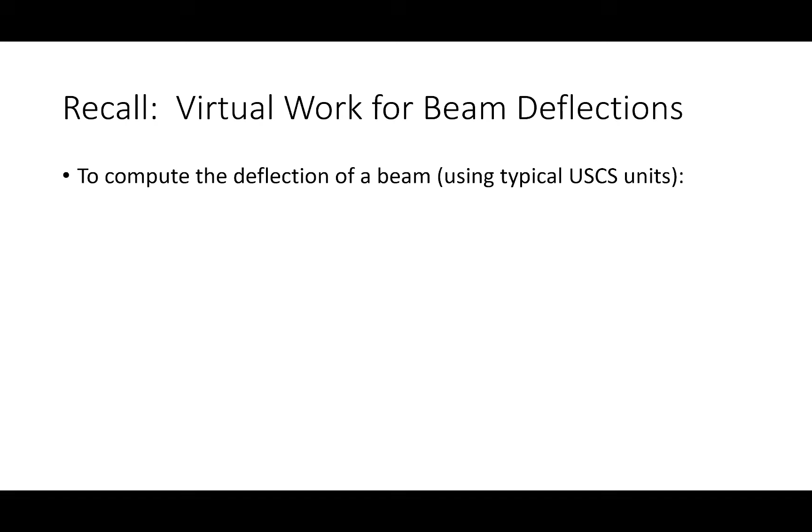So if you can do that, you'll be good. As I said, to compute beam deflection we'll use the following expression, summing up integrals instead of fractions. We'll use the same idea whether we're looking at deflections or rotations. So if I have a beam that's deforming, and I look at a given point, I'm interested in how much that point moves up and down and how much it rotates and twists.

Okay, if that makes sense. All right, so what goes into this expression?

Well, we're going to have some little m's and some big M's. Now, just like with trusses, the big capital F results were the real forces inside the truss members. Big M is the real moment inside the beam, so the big M's are going to be my moment functions. I gave you all a homework assignment due today where you had to derive moment functions. There was a reason I wanted you to do that, because we're going to need that, okay? So we need real moment functions, and we also need virtual moment functions.

Now, the same idea applies with the virtual structure as it did with trusses. We take the original structure, remove all the loads, and replace them with just a single load. We put that load at the point of interest, in the direction of assumed displacement, with a magnitude of 1. If we're looking for deflections, we place a unit force. If we're looking for rotations, we place a unit moment. Okay? Does that make sense?

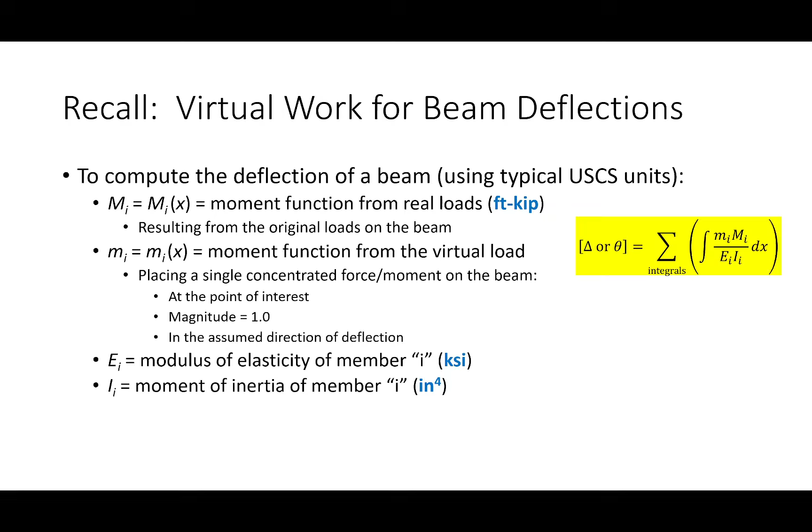Now, if you're somewhat aware of what's going on here on the slide, you'll see we have a unit inconsistency. I talked about that in the pre-recorded lecture, how we have foot-kips here, but we have KSI and inches right here. So whenever we're performing a deflection problem, we have a unit conversion factor that we need to apply. So for deflections, the unit conversion factor is 1728, and where that comes from is just the number 12 cubed, like 12 times 12 times 12, because what we have to do is convert feet to inches, but we have to do it 3 times for deflections. We only have to do it 2 times for rotations, so the number is 144.

But rotations, whenever you do the math, if it's unitless, they're in radians, and they end up being really, really small for most structural analysis problems. So to make the numbers a little bit more digestible, we'd like to express them in degrees. So I'm throwing in the 144, and then 180 over pi to get that number into degrees. So when we perform deflection calculations for beams and frames in US units, the deflections will come out in inches, the rotations will come out in degrees. Okay, so there's a very, very small amount of memorization there.

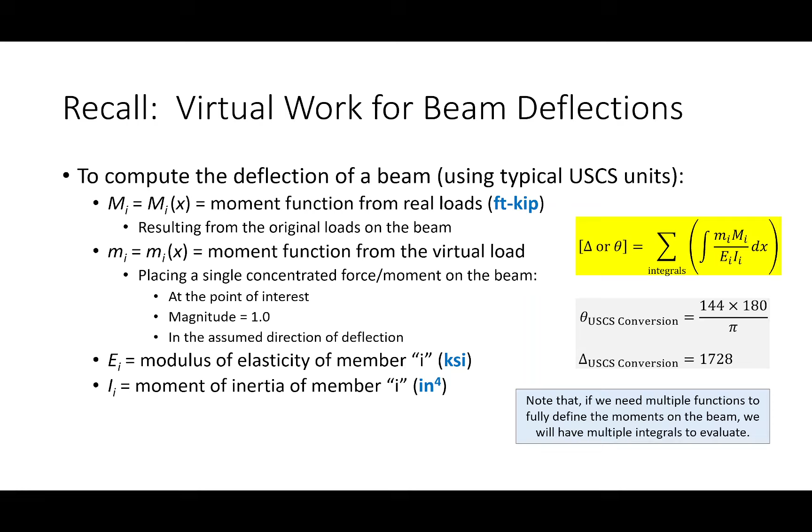Okay, today our goal is going to be looking at singular moment functions. In other words, beams where you only need a single moment function in order to define the moment diagram. And those are the only problems that we've derived moment functions for this semester. So let's talk about that, okay?

Let's look at this problem, okay? So this problem is a beam that has a support right here. This is really important, okay? I have a beam here, I have a support here, and I have a support here, okay? So let's think about what the shear diagram and the moment diagram would look like, okay?

So what do we have? We have this quadratic shear diagram, a jump, linear, jump, quadratic shear, right? And then the moment diagram, I'm going to have some sort of cubic function, parabolic function, cubic function, something like that, right? So how many separate curves define the moment diagram? I propose that the answer is 3, okay? Because there's going to be a cubic function here, a parabola here, and a cubic function there.

Now, what I'm doing right now is I'm sort of working ahead, and I'm saying, okay, if I draw the shear diagram, it looks like this. If I draw the moment diagram, it looks like this. So in order to answer that question right now, I'm having to almost like draw them and look back. But that's a lot of work, okay?

So an easy way of figuring out how many moment functions a given problem is going to need is to imagine breaking out the samurai sword or lightsaber, and imagine moving this line across the beam. Once you pass through some sort of interruption in your loads, you're going to need a new moment function. So let me explain what I mean. So here's my little folder. I'm going to cut a section and move it over. So if I cut a section right here, look to the left, what do I see?

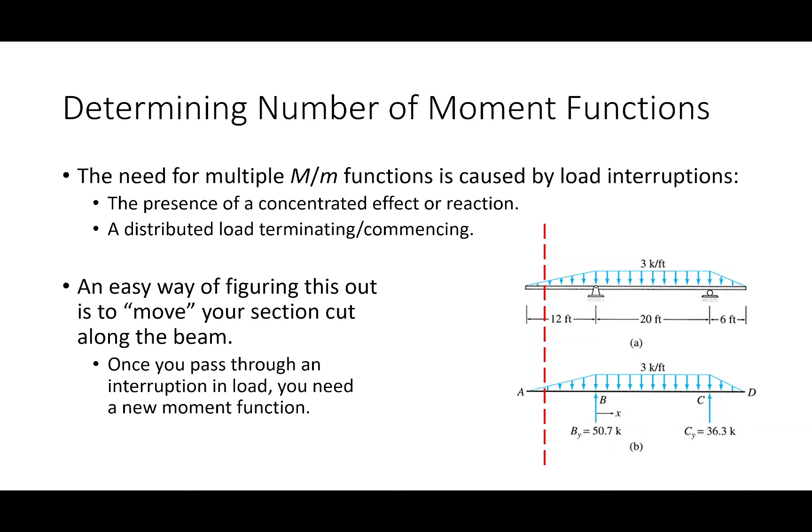With me so far? Now, the real structure is the original loads.

The virtual structure - let's think about the virtual structure, everybody. So the virtual structure, we kick off all of the loads, and we place a single load, either a unit force or a unit moment, right? That's what the virtual structure is. Would you agree that the virtual structure is only going to have concentrated forces or concentrated moments? That's all it's going to have.

The virtual structure is not going to have any distributed loads. It's not going to have any triangular loads. The virtual structure is just point loads and point moments. So here's a point load, here's a point moment.

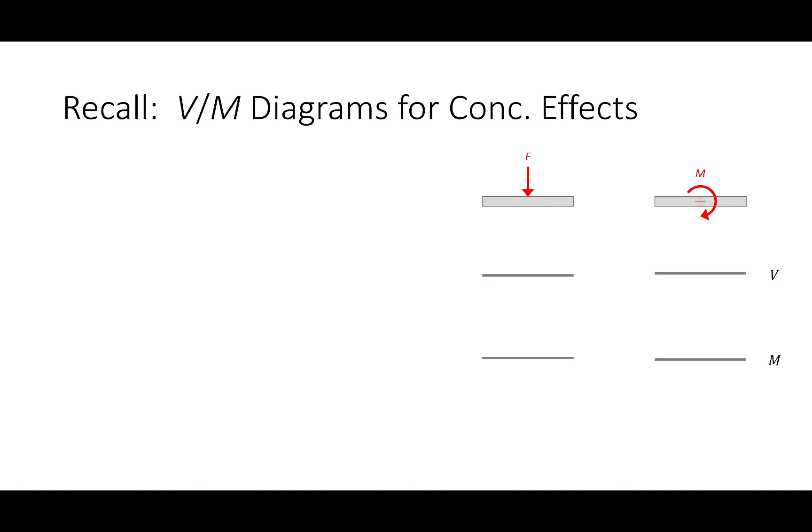This is what the shear and moment diagram looks like when you have a point load - we have a jump in shear, change in slope. What about a point moment? No change in shear, but we have a jump in the moment diagram. That's what they look like.

Now I want to look at the moment diagrams. Do you see any patterns here and here? I know it's a high level question for a Wednesday morning. I'm going to answer it for you. These are all lines.

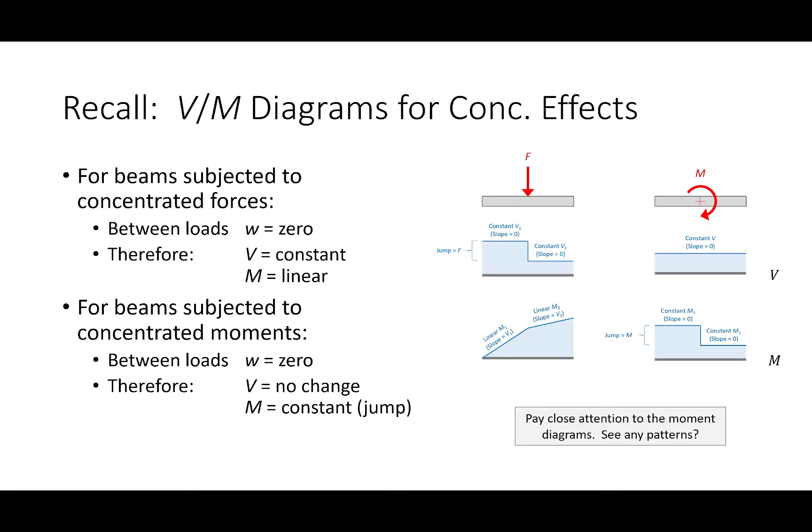I know that sounds funny, but I mean this because I've taught this class a lot. I'm telling you what's going to happen. I can't tell you how many exams I've graded where somebody's investigating a virtual structure and the moment diagram on the virtual structure has some curvature to it. It can't. The virtual moment diagram, especially for determinate structures like this - really for any structure - is going to be linear. An easy way to find the virtual moment functions is to recognize that they're going to be lines.

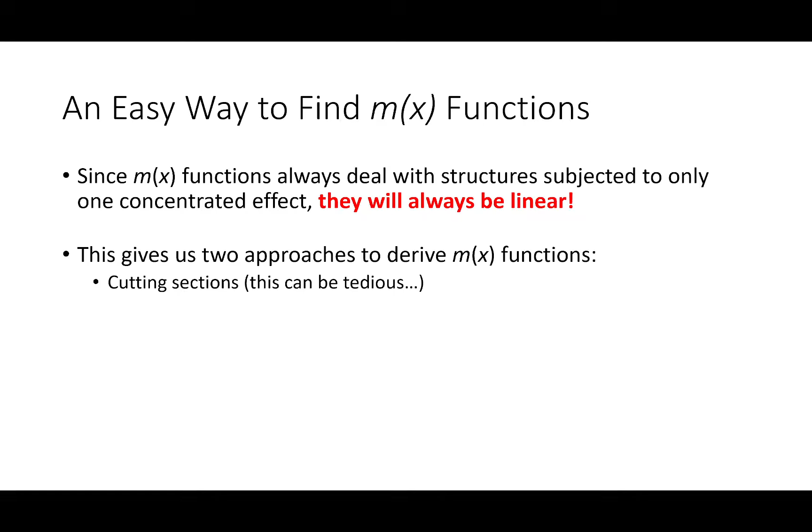So there's 2 ways you can do that. You can break out the old samurai sword or lightsaber, which can be tedious, or what about some basic geometry? How do you find the equation of a line? Well, you can get the slope of the line - don't we have the slope of the line because the slope of the line is the shear?

And then once we have a point, y minus y1 equals the slope times x minus x1, or in this case, y is the function of interest. So we can do this a lot faster if we just use point slope. And don't worry, we're going to do some practice on this.

If we graphically construct the shear diagram and the moment diagram for the virtual structure, then we can get these moment functions with a whole lot less algebra. Trust me, it will be a lot simpler.

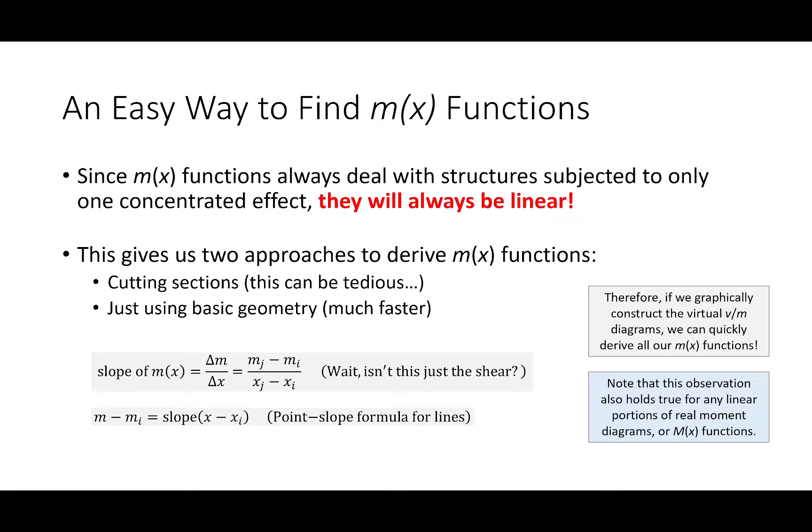And one other point is that this would work for the virtual structure, but it would also work for the real structure if the real structure had a bunch of point loads on it. To explain this and work through this process, I want to do a problem.

So I have a cantilever beam here. I want to spend this lecture finding the displacement at A, and I want to find the rotation at A. We're going to do this problem start to finish today, and then I have a homework that's very similar to this.

What I want you to do is walk through this with me. We're going to take it one step at a time. Let's just get into it.

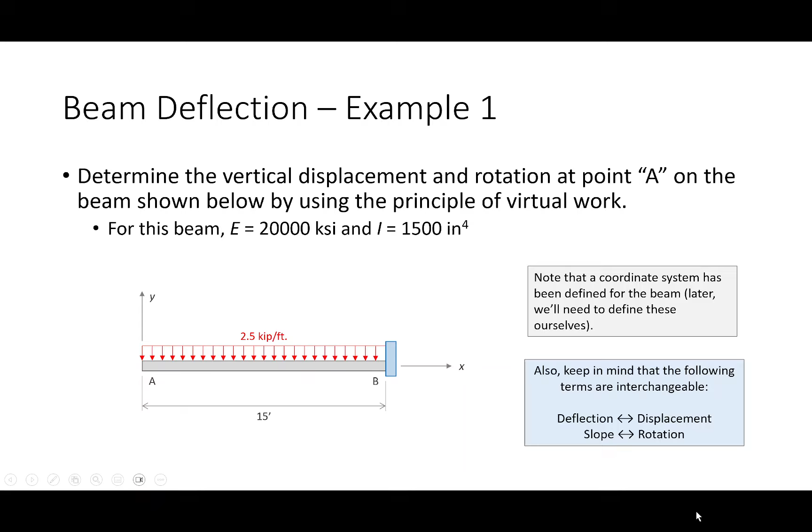Okay, now, a couple things that are on this problem that haven't been in beam problems that we've been talking about thus far.

Okay, hold on. Why is my pen not registering? Come on. There we go. I was about to say that would not be good.

Okay, a couple things to note before we go down the rabbit hole here. For shear and moment problems, I did not give you E, I did not give you I. I have for this problem because you need those values to compute deflections. Whenever we start bringing up deflections and rotations, the terms E and I have to be relevant. Either you need E and I to solve for the displacements, or for a given displacement, you can figure out what E and I needs to be. I bring up the latter because that's design - how do you size a beam? Size it so it's strong enough and stiff enough to resist the loads. So your homework assignment, instead of giving you I, I'm going to have you solve for I. Just keep that in mind.

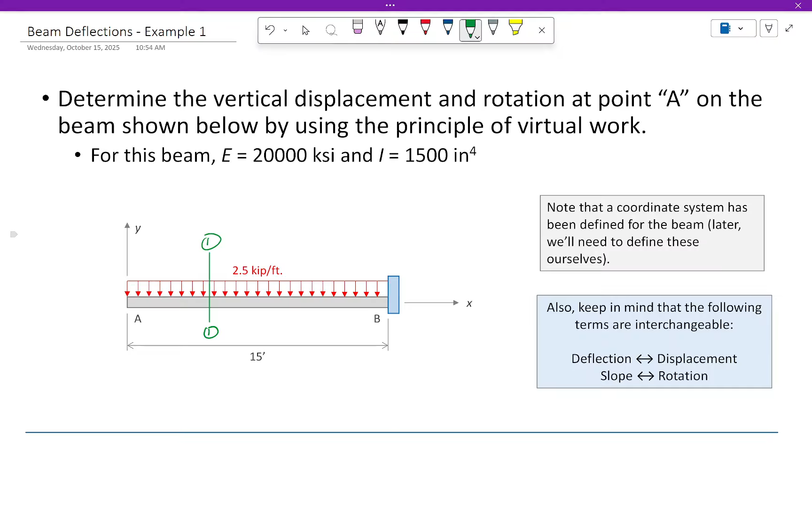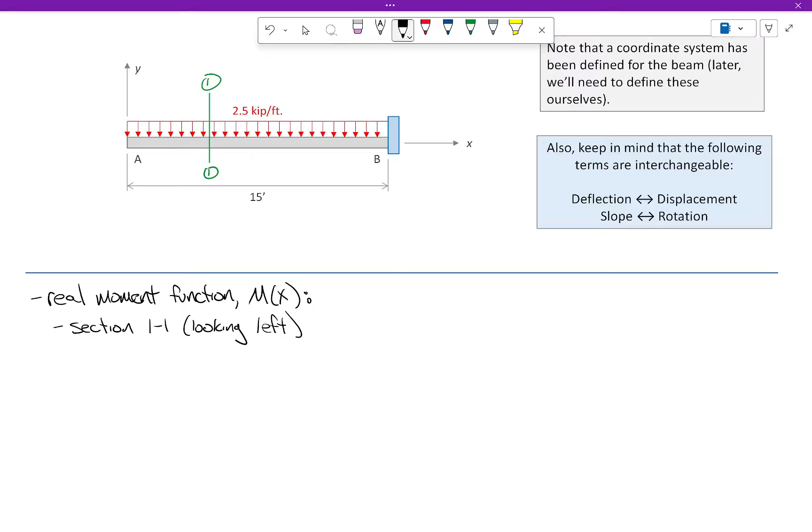Okay, so first thing we'll do - real moment function. We're going to cut a section, we're going to look to the left. So when I cut a section and look to the left, that's going to be my section.

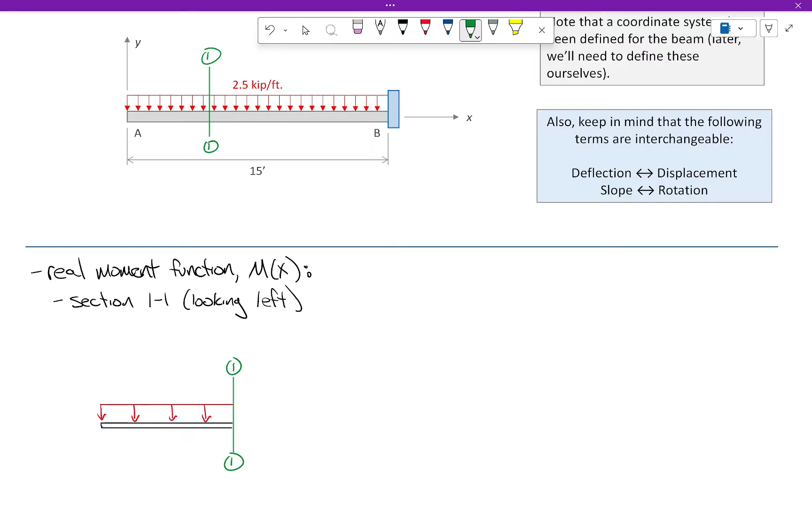Now, how long is this segment? Well, we're trying to write a function, an equation that predicts our moment. So how long is this segment right here? X, not 5 foot. Right? It's going to be X because what we want to be able to do is plug in any value, so it could be 5, 10, whatever. And here's the other thing I want to do.

Hold on, let's do something off to the side. Here's the beam. How long is this beam, by the way? 15. And what's the load on it? What was it, 1.25 or 2.5 kips per foot?

What reactions are we going to have here? We're going to have a vertical reaction, right? We're going to have a moment reaction. Are we going to have a horizontal reaction? No. Can somebody tell me what's the shear diagram going to look like?

What is it going to look like? I'm not asking for numbers, just tell me what the shear diagram is going to look like. It's gonna linearly go down and then jump up to zero. Start at 0, distributed load, go down, and then that's going to bring us back up, right? That's what I said, I'm agreeing with you.

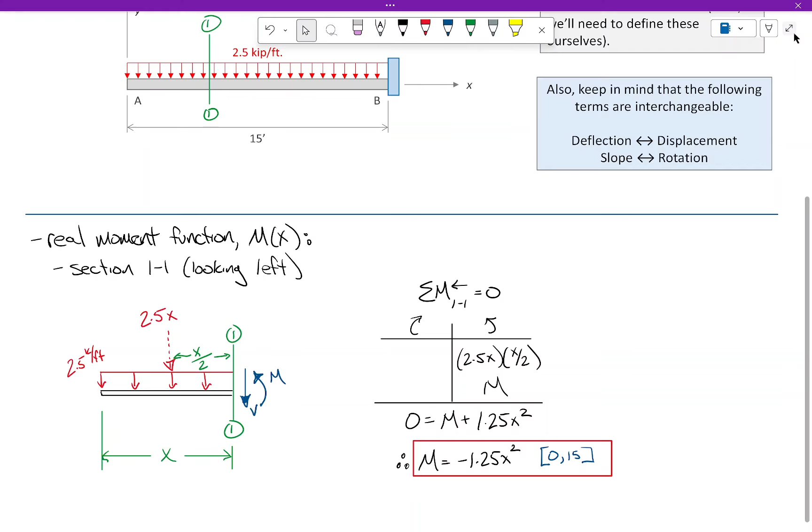Okay, now is there a simple way that we could test whether or not this equation is right? Well, that's one way, and that is a fine way. Here's another way.

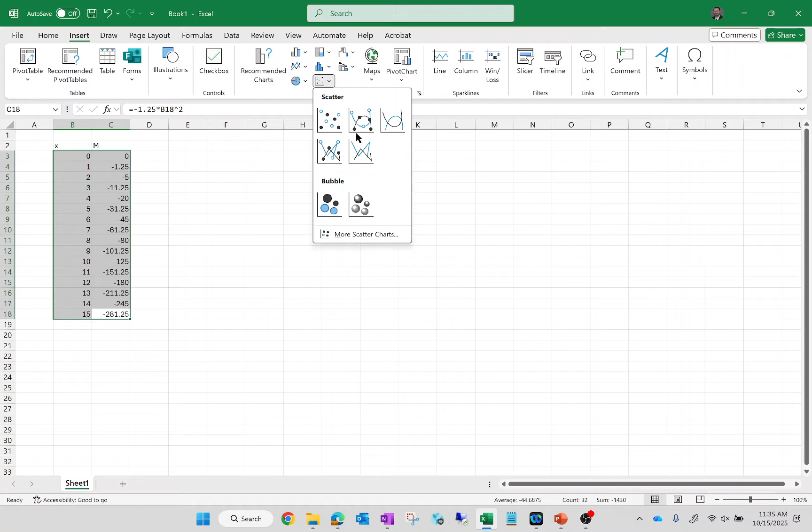So there's that. Insert. Does that look right? Looks right to me, doesn't it? So you could just plot it in Excel and see if you get the right answer. Okay, which we did. So, okay.

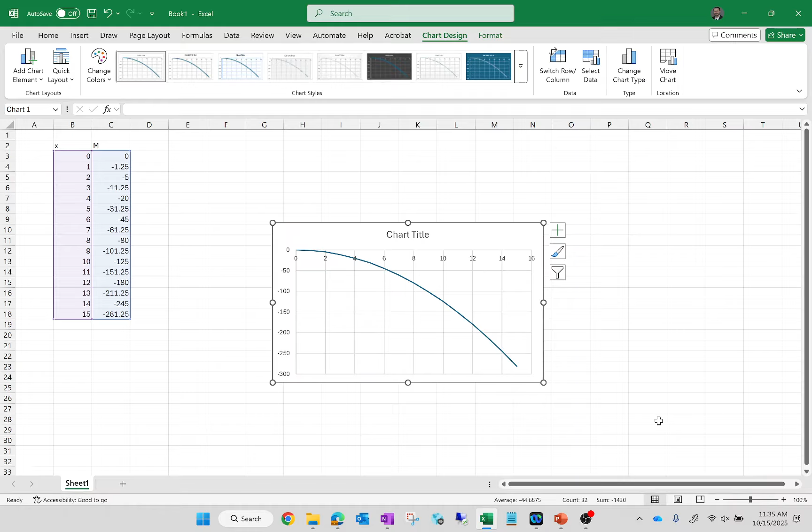So I'll put that up here on the board here. M equals minus 1.25 x squared, valid from 0 to 15. Is everybody with me on that?

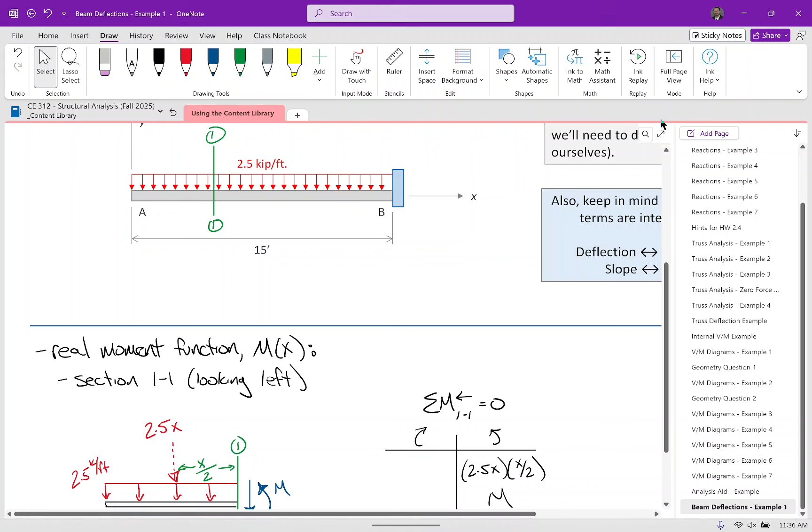Okay, now let's do a virtual structure. I'm going to do the function derivation this time. We'll do the line stuff on Friday. We'll keep it simple today.

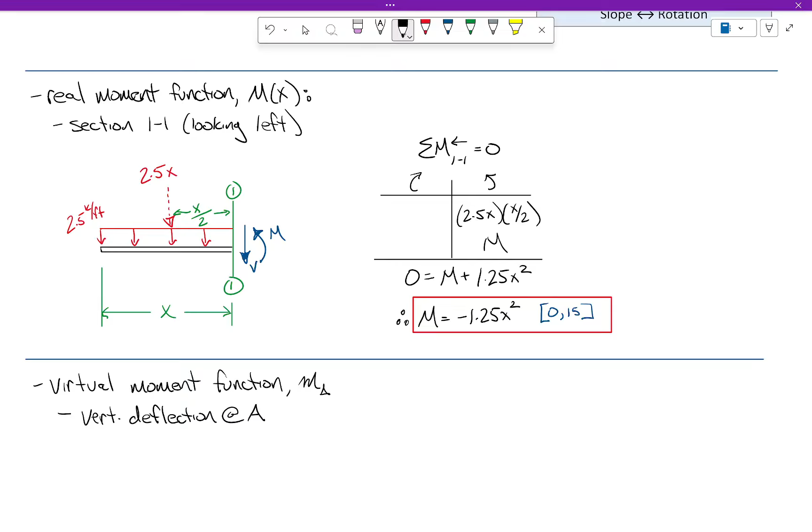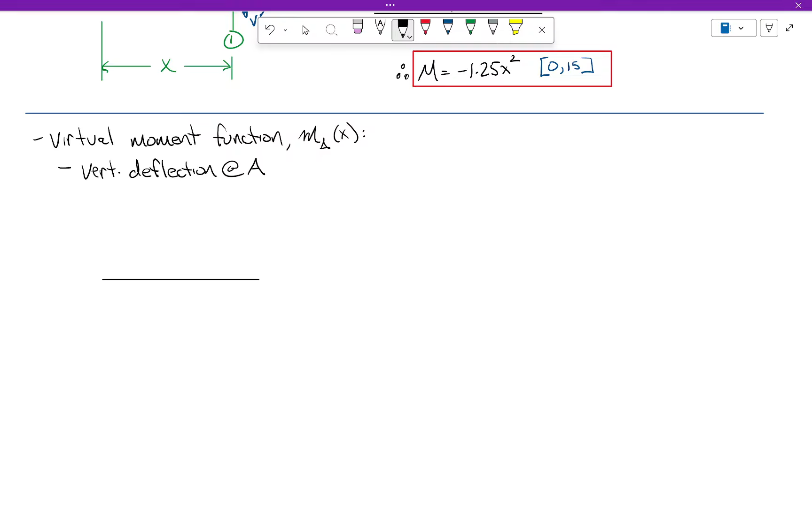So this virtual moment function is going to be for the vertical deflection at A. Okay, so I'm going to call this M delta. Okay, and how are we going to do this? So let's go to our original structure. So that's our original structure.

Okay, now the original structure had this distributed load on it. I'm going to kick those loads off. I'm interested in finding the deflection at A. So I'm going to place a vertical load right here of 1.0, just like we did with trusses.

Now you tell me, do you think this point's going to deflect upwards or downwards? Down, I heard down. So we're going to place this load downward. Okay, we're going to now cut a section.

Look this way, and let's see what we get. So, we cut a section. All right, 1.0. We have our shear. Remember, if we cut a section and look to the left, downward shear, moments like that. I'm going to use little letters now, so we'll use a little v, and a little m there. And let's see if we can derive our moments.

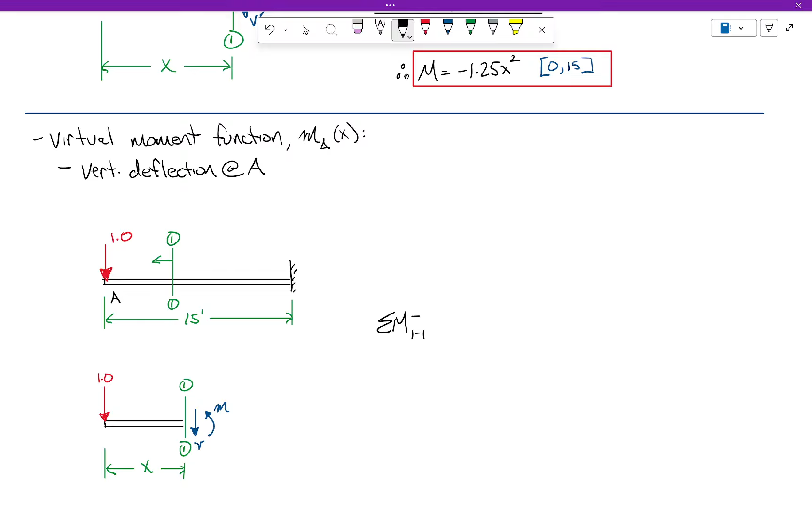So, by the way, how long is that again? X. Okay, doing good on time. So we're going to sum moments at section 1-1, looking to the left. So what do we have?

Now, I did the first one, you all help me with this one. What moments do we have and what side do we put them on? All right, so what generates moment at this section? M, which goes left or right? Right, right? And what else? 1 times X, 1 times X.

So we have 0 equals M plus X. We have M is minus X. Valid from 0 to 15. I'm going to rewrite this, though.

I'm going to call this M delta, because I'm going to have a different M for the rotation. I need to go ahead and make that a bracket. Bless you. Okay.

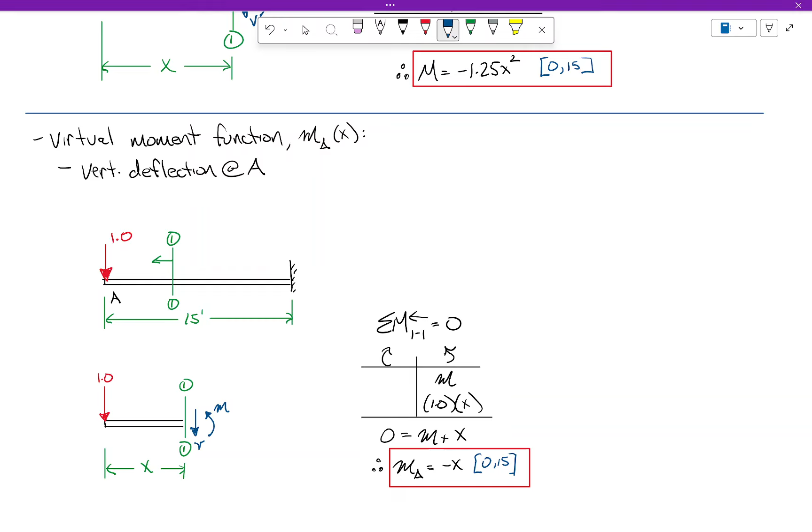Okay, so now I have everybody with me on that? Okay, if you understand that, the actual process of doing this is really, really easy. Okay, this is the hard part. The hard part is getting these. The actual virtual work is straightforward.

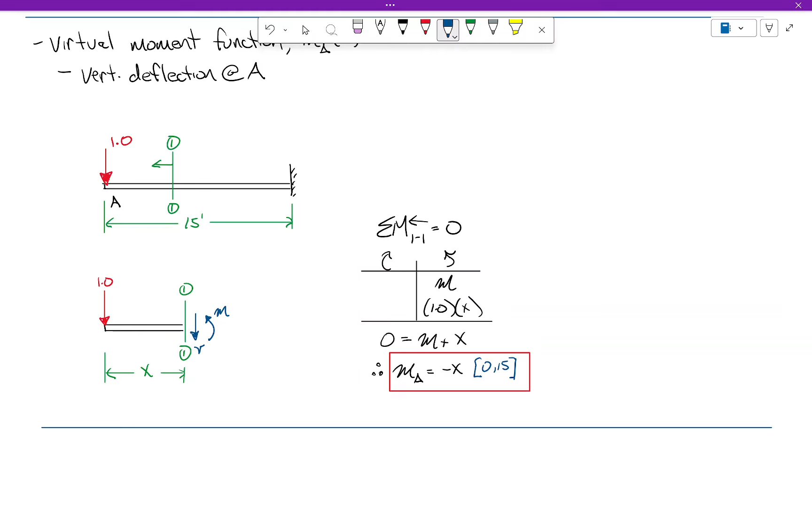Let me show you. Okay, so let's do the method of virtual work.

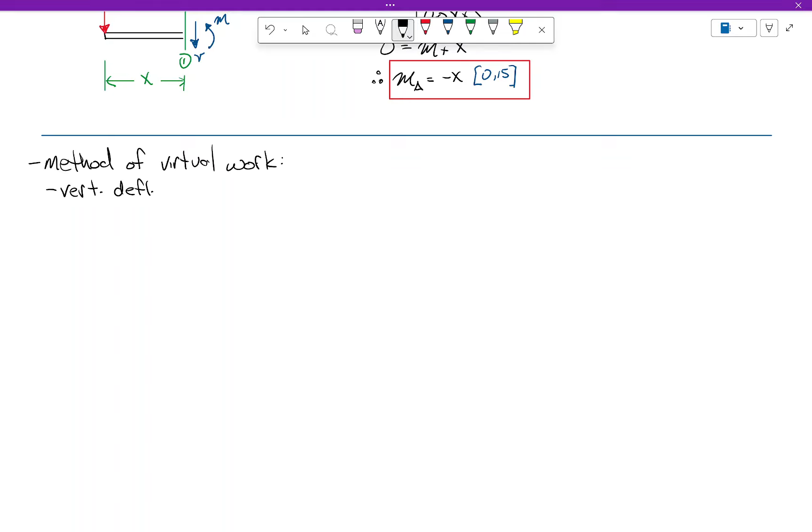Okay, so what do we have? We have big M. Let's do it in order. So little m is minus x, big M is minus 1.25 x squared.

If this is the case, in our expression, we're going to be integrating little m times big M. So if this is little m and this is big M, what's the product going to be? Negative x times negative 1.25 x squared. A negative times a negative is a positive: 1.25 x cubed.

All right, let me do something else. Let's put some units on this. This big M is going to be in foot kips, so whatever answer we generate will be in foot kips. Now the moment comes from a unitless load, so if you take a unitless load times a moment arm, technically these moments are in feet, but that doesn't really matter all that much.

The big thing I want you to be aware of is that E is 20,000 and I is 1,500. This is in KSI and this is in inches to the fourth.

So in order to compute this deflection, how do we get the deflection at A? Well, ultimately what we're doing is summing up these integrals, but we only have one integral. So we'll just call this the integral of little m, big M over EI dx.

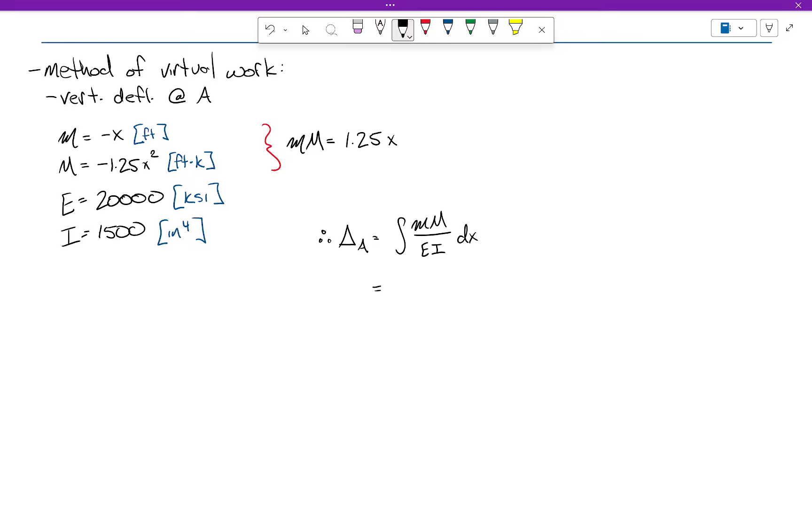Now the one thing I'm missing is a unit conversion factor. I'm calculating deflections, so I have to multiply this whole thing by 1728. And suddenly this becomes a Math 229 problem. So tell me what I can do with all these constants. What did Math 229 teach me I can do with all these constants? Put them outside the integral. Factor them out. Let's do that with every one of them.

So that means I've got 1.25, 1728. So if I pull out all these constants, what am I left with? I'm left with that, aren't I? Just an integral from x equals 0 to x equals 15 of x cubed dx.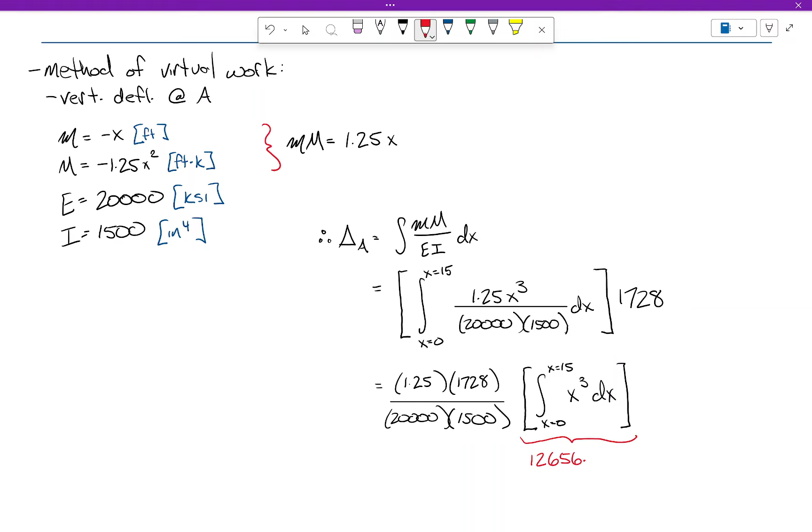I have to believe that's something you don't need me to show you how to do. Again, you can plug that into your Casio FX115 ES Plus or similar scientific calculator right now. It will yield 12656.25. In case you want me to do that, I'm hoping that's simple, but right? Because we're just integrating x to the third from 0 to 15.

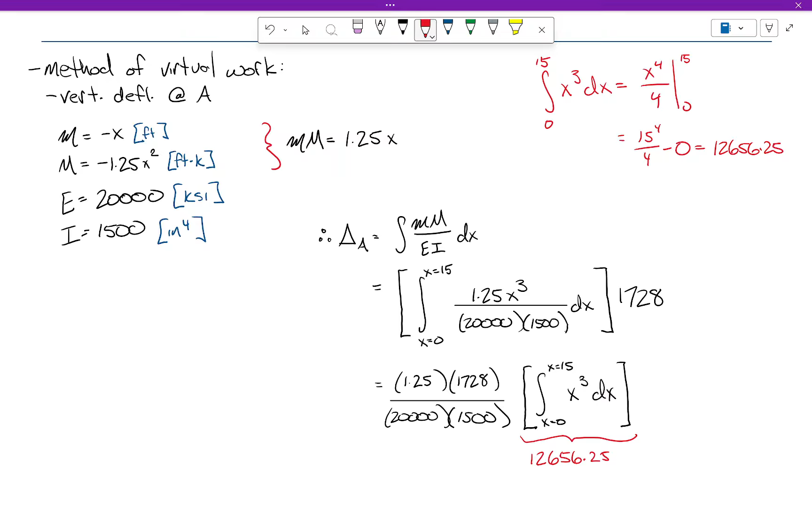So the integral of x to the third is x to the fourth over 4. 15, plug in the top number, minus plug in the bottom number. Boom. So what is this when you chug all that out? You don't have Casio FX115 ES Pluses or similar scientific calculators.

0.911. Do I have a second on that? Yes. So therefore, what that means is point A on this beam bends downward and it deflects 0.911 inches downward.

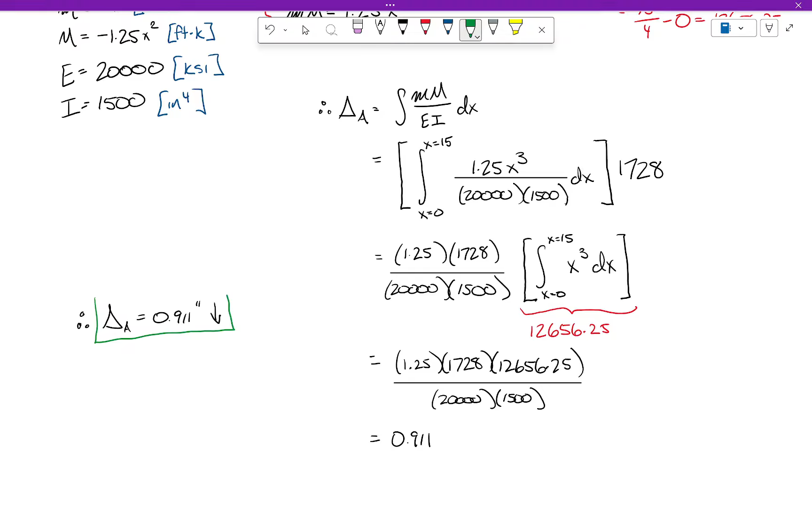That's not too bad, is it? I mean, you tell me, is that pretty straightforward? Okay, now we're not going to have time to do the rotation one, but...

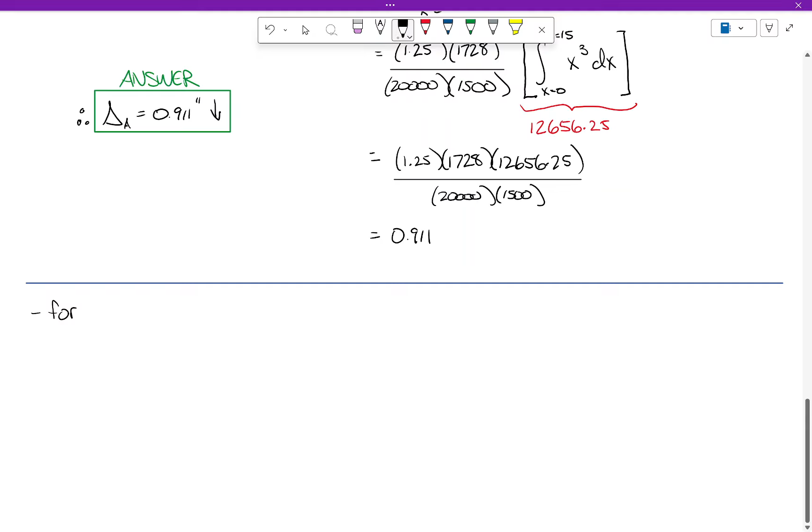Since I've gotten requests to give answers in the back of the book, here's what I'm going to do. I'm going to give you a couple of answers, and I want you to be able to do this on your own. That's your moment function. This is one of those, I want you to work on this on your own. And the rotation is that.

I'm giving you the answer. You all can do the work. And whether you'll do it or not, I don't know, but you do have a homework that's due on Friday, that all it will do is make this a little bit easier to do. Sound good?

Then again, I know you have a materials exam from that horrible professor tomorrow, so you'll have to deal with that. That's all I got, everybody. I'll see you tomorrow. Well, most of you, I'll see you tomorrow.